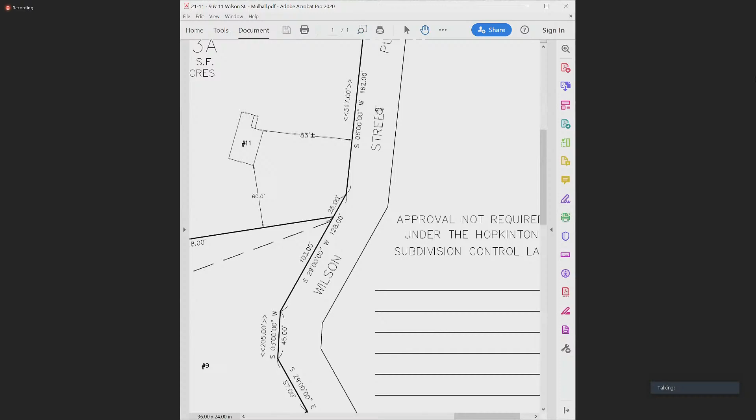Okay. And I know that you had one issue with this, John. Do you want to just highlight that? It says Wilson Road in the title block. It should be Wilson Street. I've got it right on the road, on the title block. So what we can do is on the Mylar, I can just cross off 'road' and write 'street.' And then if that's what the board wants, we can do that.

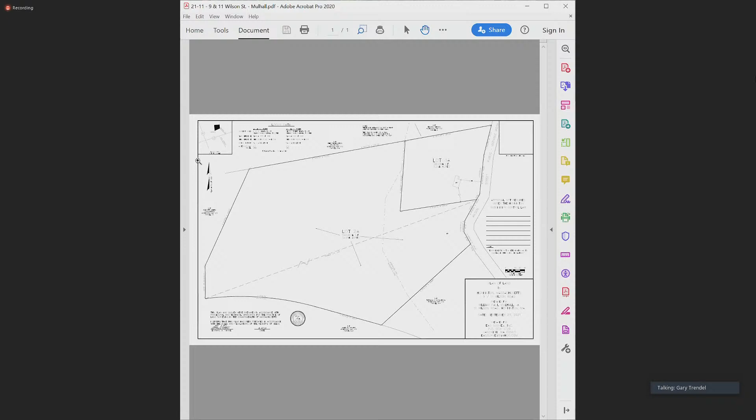Okay, any questions or comments from the board on this A&R? Through you, Mr. Chair. Yes. Do we know why they're doing this? Do they plan on selling the other lot or? We don't know. Okay, thank you.

Is everyone comfortable with John handwriting the correction? I know he has reached out on several instances to the applicant. They haven't responded, but is anybody uncomfortable with John handwriting on it so that it's corrected before we actually sign it?

I see thumbs up. All right. If there aren't any other questions or comments, I will entertain a motion to endorse the A&R for 9 and 11 Wilson Street. So moved, Sundar Sivaram. Mary Larson Marlowe, second. Motion and a second. Assuming no further discussion, we'll take a vote.

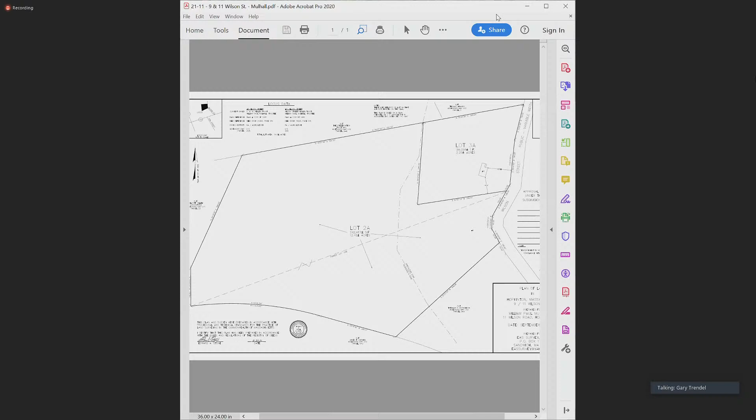Mary, how do you vote? Mary Larson Marlowe, yes. Rob? Rob Benson, yes. Jane? Jane Moran, yes. Dave? Dave Paul, yes. Sundar? Sundar Sivaram, yes. Fran? Fran DeYoung, yes. And Gary Trendel is a yes as well.

Motion carries. The next A&R is for lots 6, 7, 8, 9, and 10 Fitch Ave. Is Mr. Greenwald or an applicant for Mr. Greenwald on the call?

Rob Truax here from GLM Engineering Consultants, representing the applicant. Hi, Rob, how are you? Hey, good, how you doing? Good. Do you want to quickly explain to us the purpose and need for your A&R?

Yep, I will. So this Fitch Ave is not built at this time. It's a private way. Technically it's a subdivision that was approved 20, 30 years ago. There's been litigation with Mr. Greenwald and the owners with the town of Hopkinton. As part of the settlement agreement, my understanding is we're going to create this Lot E, which is up along the town of Hopkinton property. That area is surrounded by the town of Hopkinton property - the school is on one side, the athletic fields are on the other.

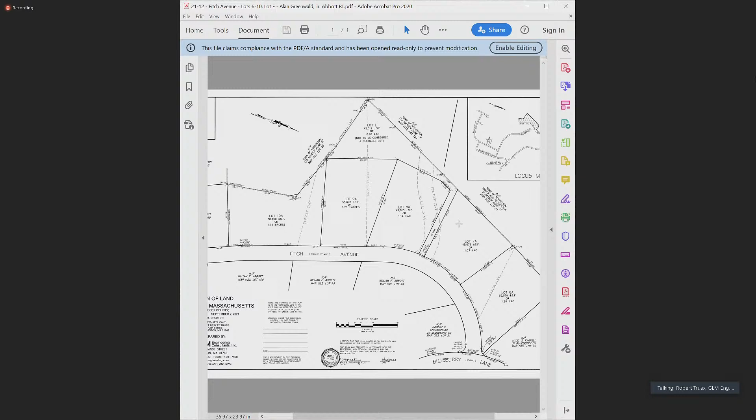The idea was Lot E would be conveyed to the town of Hopkinton with a 20-foot access way out to Fitch Ave. So we're rearranging all the lots on that side of the road from Lot 6 up to Lot 10 - that's the little strip that would go out. They wanted a minimum of 20 feet out to Fitch Ave. I'm assuming it would be for a walking trail to get from this side of Blueberry Lane, Fitch Ave, etc, up to the school and athletic fields. So that's the main purpose of the plan, to create that Lot E in the back there in the corner.

Okay, and then just so people know, we're rearranging - we just rearranged the frontages along Fitch Ave as well for those 5 lots. Am I reading this correctly that the dotted lines are the old lot lines? Correct. Okay.

All right, Mr. Gelcich, any comments from your office? No, we've gotten a question from a planning board member asking if this is allowed. I think as Mr. Truax said, it's a road that's laid out in a subdivision, so that's why it can go through the A&R process. Even though the road is not constructed yet, it is a way in existence, essentially - it's been an approved subdivision plan. The subdivision has been substantially constructed, so this would generally warrant endorsement.

All right, thanks, John. Questions or comments from the board? Through you, Mr. Chair. Yes, Dave. So I have two questions - the first one's really quick, addressed to John. Is there an open ending that the approval never expires? I think you've told us once before, but I forget the answer to how long an approval lasts for.

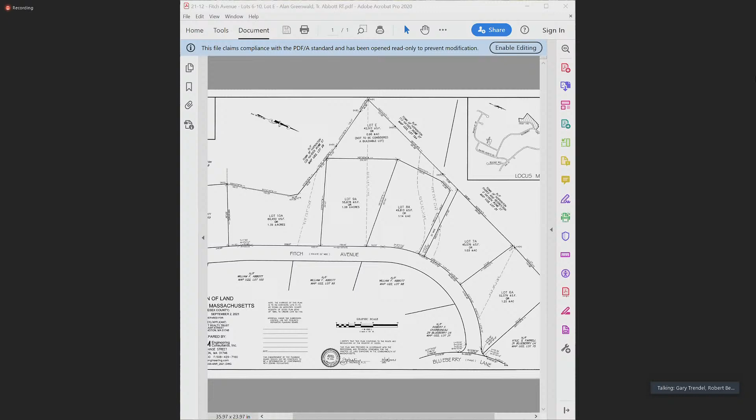All right, any further questions? That's just an overview. I know you're all concerned because it is an A&R, so I'm just trying to give you as chair as much info as I can.

Yeah, go ahead, Rob. So just to give an overview of timing here, Blueberry Lane was built in the early 90s, around 91, 92, 93, so 30 years ago. So the approvals happened before that. That was before EMC Park was built. That's why that road was there to that parcel of land, or what looks like a right of way. From my point of view, I think it was there to connect to that piece of land where EMC Park now is.

And maybe John can correct me if I'm wrong, but the subdivision control law came into existence as it is now in 1996, after this subdivision was built. It seems unusual to say a subdivision has been substantially built from 30 years ago and that it's still being built and that it could go through this A&R process. I just don't fundamentally agree with that. I don't see how that's appropriate without providing notice to abutters when they've lived there for 30 years. Too much time has passed that it's still, from my point of view, an active, approved subdivision. That's my take.

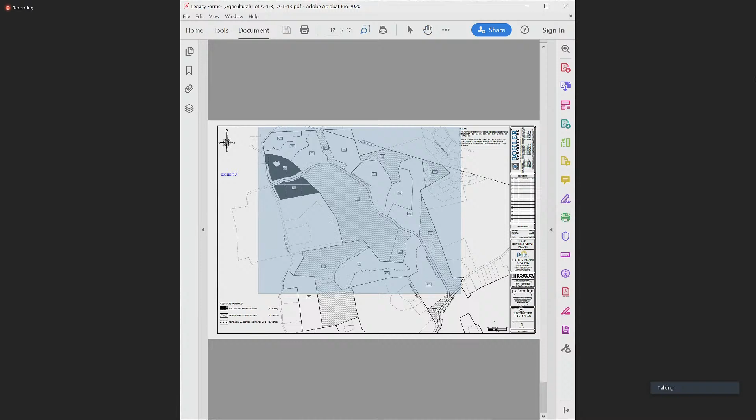And sorry, just as I asked that, now that it's pulled up, Todd, can you just tell us really quickly again as we look at this what specifically this is? Absolutely. The kind of darker striped area, near the top left, is the agricultural restriction. Weston Nurseries will use this area, have the ability to grow some of their PJMs and various other material that they will continue to grow on site in those locations.

The lightest color area, the dots you see along the roadways mostly and a couple other areas, is restored and landscaped area. Mostly that's area that's being mowed or maintained, or it could be part of a stormwater area that's being annually maintained. The striped area, the largest area, is the natural state restricted land. This really just encompasses trails and areas for people to enjoy and walk through, but there's no active recreation, no agricultural use, and it's not being mowed every week. Only the trail areas would be maintained for residents and all residents to use.

Okay, thanks, Todd. And the white areas are the development pods where all the homes are being built. Within those areas is additional restricted land, but those are done separately. All right, thanks, Todd. Questions or comments from the board?

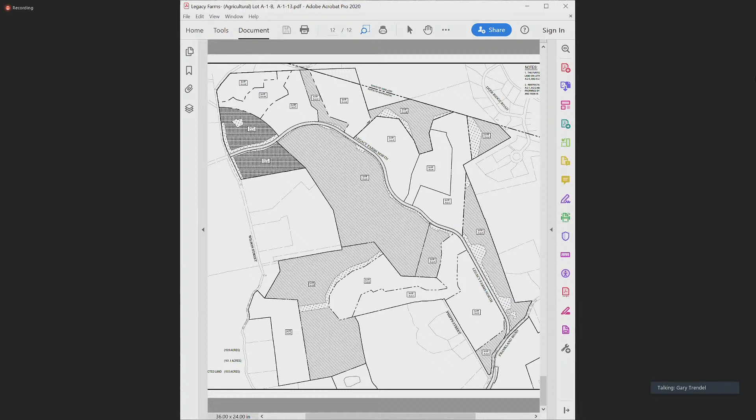Okay, any further questions before we take a couple of votes here? John, is it possible we can vote on all three of these at the same time? So why not. Okay, and what are we doing? We're accepting restricted land covenants? The official vote would be voting to approve the restricted land covenants and to allow for the planning board chair to sign on behalf of the board. I'd make a motion for that. All right, second. So there's a motion and a second as stated by our principal planner. Assuming no further discussion, we'll go ahead and vote.

Mary, how do you vote? Mary Larson Marlowe, yes. Rob? Rob Benson, yes. Jane? Jane Moran, yes. Dave? Dave Paul, yes. Sundar? Sundar Sivaram, yes. Fran? Fran DeYoung, yes. And Gary Trendel is a yes.

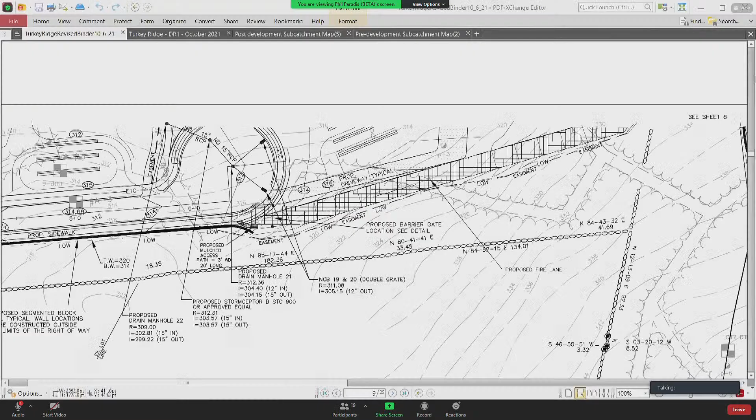Can you see that? Yes, yep. So one of the concerns we have - well, there's a few concerns - relative to the access road.

This access road will need to be open and accessible at all times of the year for fire department and emergency vehicles to be able to cross through this area. So the road needs to be fairly well-designed and not susceptible to vehicles getting stuck. There are a few things - one is just the entrance.

This is the road, this is the curb line, and it's shown off the pavement in a really awkward situation. Concurrent with that, you have a low point right in front of a driveway. It's not an ideal situation.

My recommendation is that everything gets pushed up like 20 to 25 feet, and maybe the access road comes off right here. That would allow the fire access to go straight. Right now he has to hit the curb at a weird angle to get in, and under severe conditions it may be difficult to do, or he's going to hit the gate or something.

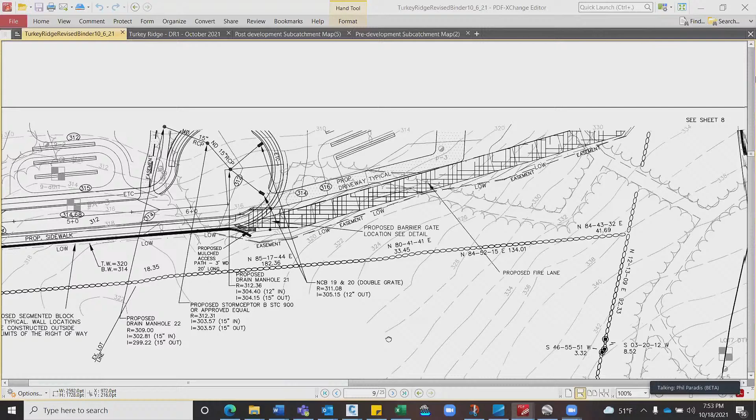So I really want this revised - this is a road and it should be a fixed radius in the design, and the profile should look continuous as well. Let me see if I can get to the profile.

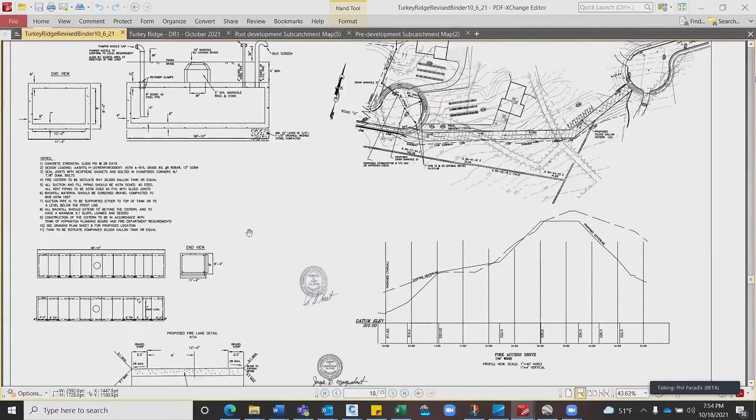In order for a vehicle to really be able to access these, you don't want to get a vehicle stuck because the front wheels are down and the back wheels are down, but you've got this sticking up. So there should be some vertical curves to smooth this out.

And engineer it, as well as we should know what the slope is here. This may be 10% or in excess of 10% slope, and depending on the material, it may be difficult to maneuver under wet conditions. So I think this road really needs to be engineered.

Bottom line. All right, Shane, where does this stand from your perspective? Because I think Phil makes some pretty good points, and if we were to apply a level of consistency, I look at how the connection has been designed and engineered between Chamberlain and Wayland. It is designed and engineered as a road.

When speaking with Joe today, obviously this isn't a public road, and hopefully it will never be used. I know he did all the sweep analysis with the fire truck, and we've coordinated that with Chief Miller to make sure the fire trucks are able to go from one end to the other. We're really tight for space at the front of that lot to shift that road. We've already moved it once to try to get it so it wasn't shared with the driveway, so we were pretty limited there. But the roadway itself meets all the sweep analysis for the fire trucks. Joe didn't treat this as a roadway, because it's not a public right of way. It's not to be used by anybody but a fire truck in the case of an emergency.

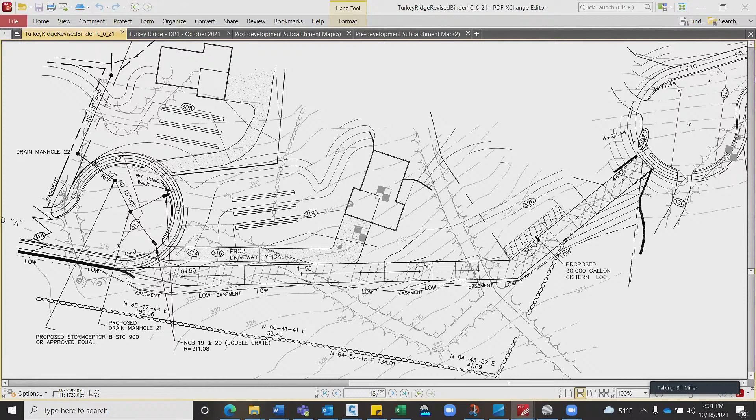Chief, are you comfortable that that's not a radius turn there? As I look at it, it does pose a little bit of concern. I want us to revisit that swept path analysis, showing if we could incorporate it into this. We did that at the entrance of the Chamberlain Wayland project, with the ladder showing the arc of the turns going in. I would like to see that if we could.

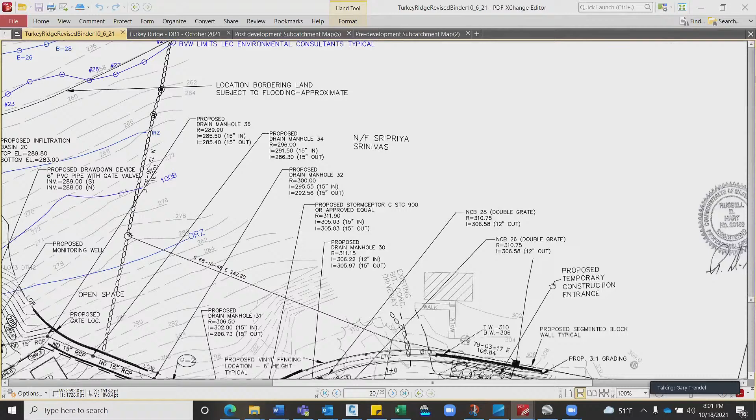And Chief, while we've got you unmuted, I'm also curious to hear your perspective on the westerly entrance, and also the elevation profile if you have concerns there. I'll be honest, I didn't realize the elevation profile until tonight, so yes, I do have some concerns.

We have to make sure that the bottom, what we call the beaver tail of the rear end of the truck, is not going to bottom out going up one of these inclines. That's A. B is, again, winter conditions - what are the grades? Will we be able to maneuver up and down without sliding or causing an accident or getting stuck going up?

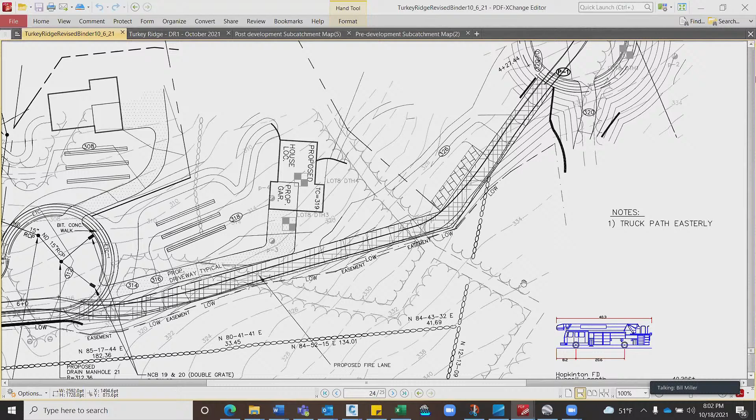And third, Gary, the end of the Cedar Street extension - show me the swept path analysis with the ladder, show me the arcs and curves on that corner, that'll work. And if not, then as you guys stated, potentially look at something a little less intrusive for coming in with that.

And Chief, do the curb cuts matter to you? Looking at that entry point, I'm not sure where the curb cuts would be to drive up through there. Honestly, Gary, we don't want to drive on a curb or someone's lawn getting in - that's something we definitely don't want to do. If you remember the entrance to Chamberlain, we had the same issue with that corner. We ended up taking the trees down and pushing that corner back so we could make that sweep. It's identical to what we're looking at right here.

Okay, to the chair. Go ahead, Jane. I agree with Beta's comments, and I think all the questions the chief is asking would be answered completely in a full engineering design for a road, if this were designed better. I'm very concerned about those 10% grades, especially at the curve. I'd like to see where the grade starts, considering that curve - if that's at the curve and they're expected to go up a 10% grade, that's quite a bit. Same thing coming down - it doesn't look too healthy for them at first look, after hearing Beta's comments.

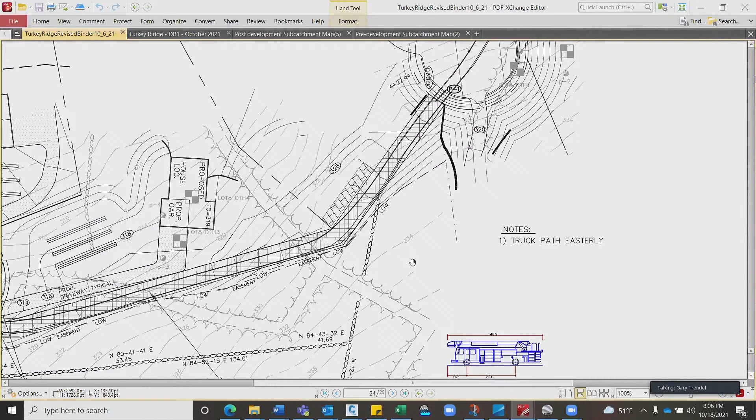I couldn't tell you what the design standards are for a road, but in my opinion, I think we need to treat this like a gravel road would be treated, and that's to ensure proper access if it's required.

To you, Mr. Chair, I know we kind of want to move on this one, but can we take a quick look at that elevation again? Can we tell what the difference in elevation is between the two cul-de-sacs?

So they're roughly the same, it looks like, right? You just have to go up and down. And Phil, what's the height from the bottom to the top? So this says 311.83 to 330. So like 20 feet, if I'm understanding that? Yep, 19 feet, almost.

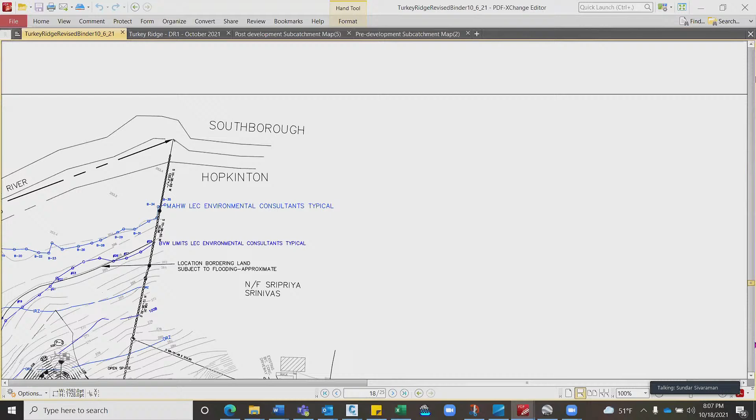Thank you. Through the chair, clarifying question. I recall hearing that a swept analysis was done, but now I'm hearing it may not have been done, or done with the wrong truck specifications, fire truck specifications. Could you please clarify that?

So the swept path analysis was submitted. Again, if you look at it, the truck has to hit the curb at an angle, which is not ideal. And he's maxing out, so this 16-foot wide drive is something of a misnomer.

Let me see if I can find the section. Oh, went the wrong way.

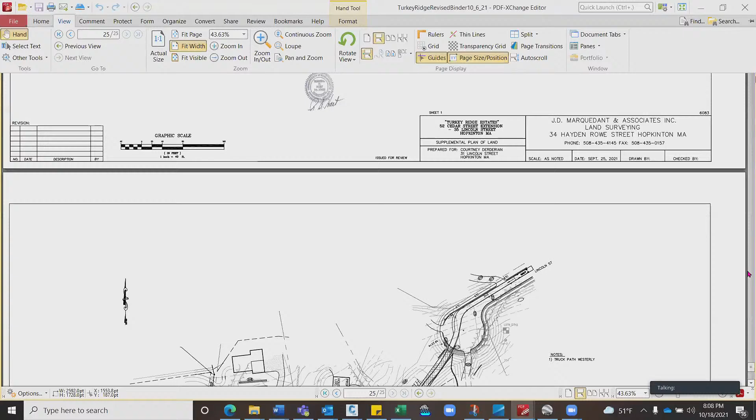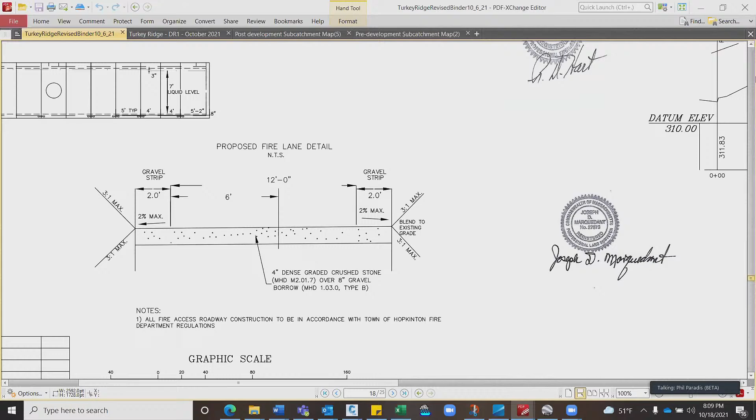So there's a gravel strip. Not quite sure what this is trying to show, but it's dense graded crushed stone and then a gravel strip. So the truck actually has to go off the dense graded stone on one side and then come back on the other side, so it has to use the entire 16-foot width based on the swept path analysis. If they go over, I don't know how bad that is, but...

Yeah, go ahead, Mary. That's something I was thinking about as well, Phil. I'm just wondering, for a gravel road, what is the usable width, particularly in the winter, when it's being plowed? Are they plowing every inch of that 16-foot width onto the downward sloping shoulders, because that's what would be necessary for this use? If it's gravel, I don't think of a gravel road as using every inch of it. I think of using the center with a little bit on each side, so kind of 12 feet plus a little extra for tires to go over. That's my concern, particularly in the winter.

Just to follow up to Mary's point, if I may, Mr. Chair. Sure, Dave. She brought up a great point. Plowing on gravel seems to be a problem. Is that what we're doing on Chamberlain? Gravel as well? No, it's paved.

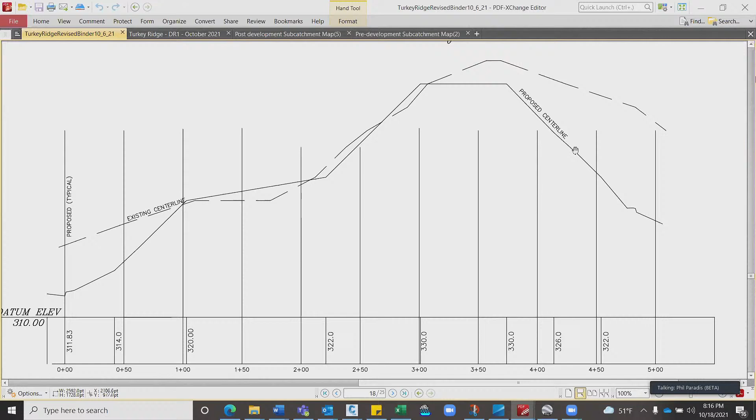So the second issue is that this should be a rounded curve to provide better access. Right now it requires maximizing the width, and if you're off by a little bit, your truck may be in trouble. The third thing is that the profile is just not well designed. You've got a steep incline here, and then it's your turning point. This should be fitted with curves to allow the vehicle to transition over the change in grade safely. We'd also expect to see what this grade is. 10%? Yeah, that's pretty steep, and then to go from 10% to 0 and then down 10% - that's not a well-designed road.

And I guess, Mr. Chairman, we all appreciate that this access road is only for emergency vehicles, that fire and police will make their way to utilize this when convenient. We don't anticipate frequent traffic - in fact, we anticipate no traffic. But I understand concern about access through that road, but the only folks using that are fire and police in an emergency situation. Yep, I understand.

So I'm not concerned with sight lines, I'm not concerned with two-way traffic, but I do put a lot of weight on the perspective of our emergency personnel, and I want to make sure the emergency apparatus can get through that emergency access road if need be. And based on the previous discussion I heard, neither Beta nor our fire chief are comfortable with the emergency access road as it has been proposed. Again, that's just speaking for myself here - that's my perspective, but it's also based on the conversation we've had.

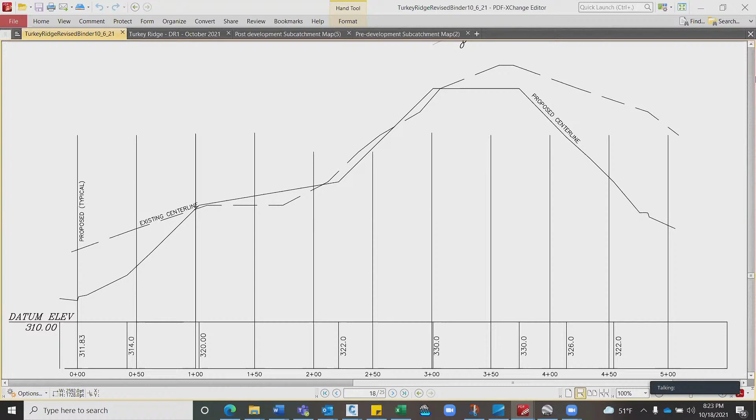On the drives 1, 3, and 5? I guess I don't follow your thrust, Phil. Phil, are you able to show us on the drawings? Yep, I can do that.

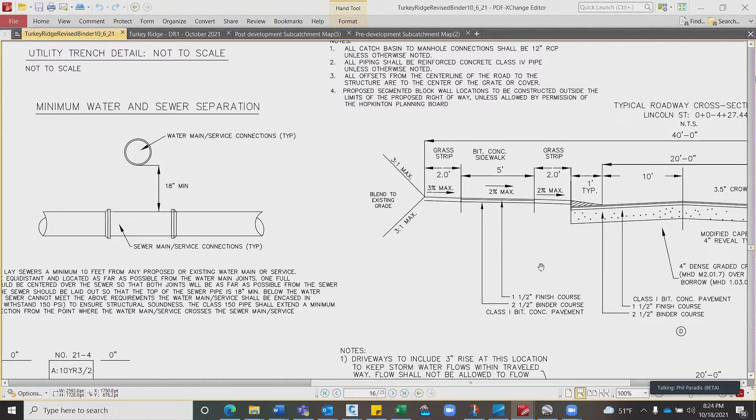So that's your typical section. Okay, here's the driveway section. Sheet 16, right. So the plan shows it dropping from the edge of pavement down.

So now you're introducing this 5-foot area going up, but you're still showing the driveway up. It should be down. It should show a thought-through engineered plan - like a radius here, it should show a radius, and show the intention of this section.

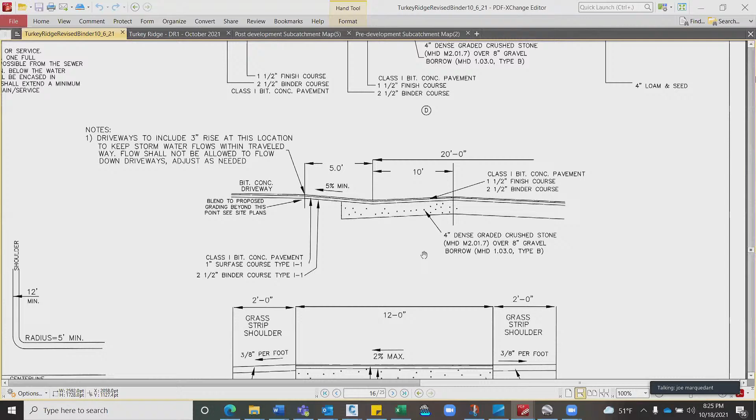So the 3-inch lip is what we're trying to convey. In that short distance, we'll make up a 3-inch lip to provide the mound that you spoke of, and then blend down to the grading shown on the plan.

I guess I'm asking, are you looking for individual details of lots 1, 3, and 5? Just show me whatever your typical slope is coming down from the driveway, and then show me how you're going to engineer that. What am I going to look at when I'm out in the field inspecting these?

The 3-inch rise at the location to keep stormwater flow within the travel way is shown in note 1.

Sure, Dave. I think, Joe, what he's suggesting is this kind of looks like a flat driveway here. I think he wants to see an average of those lots and a sharp, rounded decline on the left. Does that make sense?

These are not terribly difficult details. These are typical details, so they should be provided. Joe, can you provide that? Certainly. All right.

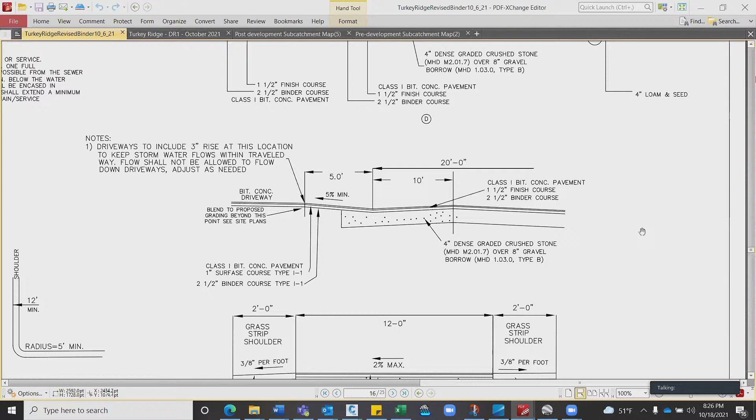How about D6? Open space trail plan. So it sounds like, Joe, you're not in a position to respond to that. Shane, are you able to respond to comment D6? I'm actually going to take it, Gary.

That's okay. So we've worked with Halt, and we have no intentions of creating new trails out there. All the trails that we've all seen on previous plans no longer exist. So when open space is donated, Halt will come in and work their magic. We don't have anything to do with it.

I know in a number of other plans that's been something we've gone into the details on, what that trail plan looks like. But before I go further, I see Mr. Dauchi has his hand raised. We'll go ahead and hear from Mr. Dauchi, who I think is probably representing Halt.

Charles Dauchi, 25 Sanctuary Lane, member of the Halt Board of Directors. I would concur here that the trail network, so-called, that is shown on the plan really does not appear to have been a functioning through trail network, as has been the case in some other subdivisions.

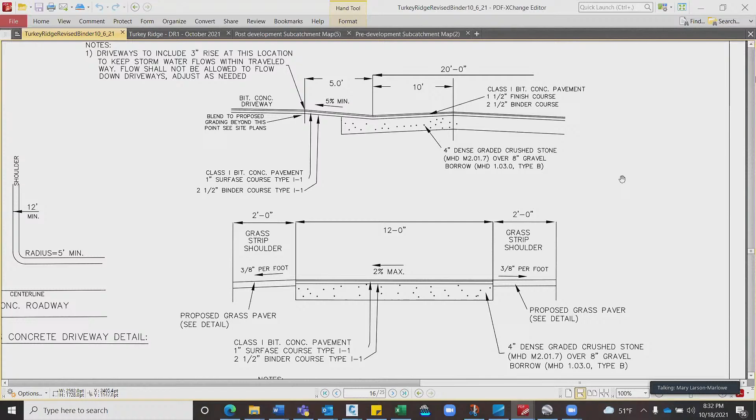Yep. Through the chair, it sounds like Chuck had indicated that there are some accessibility issues in terms of where those entries into the open space are proposed. So I think we just need to ensure that there aren't retaining walls in the way or whatever the case may be. Can we take a quick look at those? Yep. I think that's where Phil's going to.

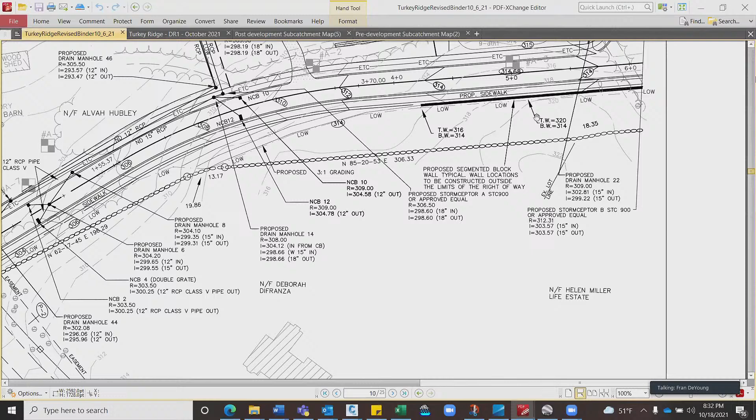And as Phil's pulling that up, Mr. Chairman, I think it's one of the things we should ideally come to agreement on regarding public access being secured and maintained, as Mr. Dauchi mentioned. What transpires within that is up to whatever entity takes that over. But securing that public access, I think, is an important component, and now would be the right time to do that.

Through the chair, clarifying question on that.

Sundar, Mr. Dauchi said that HALT is not committed to taking over the land for trail purposes. Just out of curiosity, if the public access question is not resolved to everyone's satisfaction, where does that leave this? If open space is still preserved, but due to various reasons an entity doesn't commit to building trails out there, is that, for lack of a better term, a deal breaker?

May I, Mr. Chair? Yes. Go ahead, Courtney. Thank you. So I do want to clarify that the way the plans are right now, there is 100% public access each way.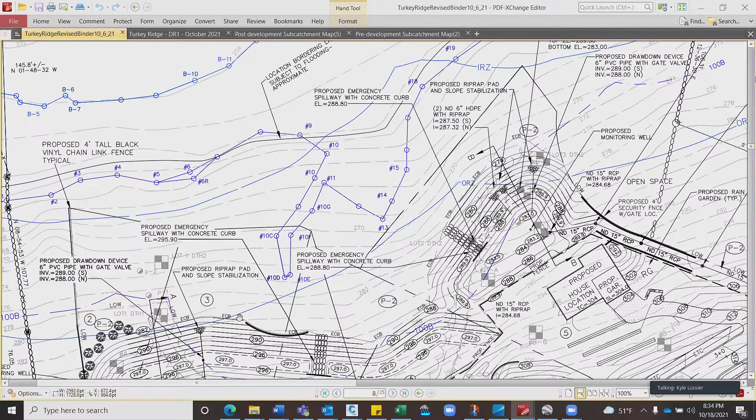From the very beginning, when we began talking about this project, there is a connection from Cedar Street Extension through Lincoln, all the way on our road into Hopkinton State Park. That was really important to HALT, and important to the planning board from the beginning. So that has not been changed or altered. There is public access. To answer the other question, we certainly are fond of HALT and hope we can come to an agreement so that's the group that takes over this space. We're going to work as hard as we can to make that happen. If we cannot meet all of their requirements, we do have a plan B in process, so we have a backup plan if this land does not go to HALT.

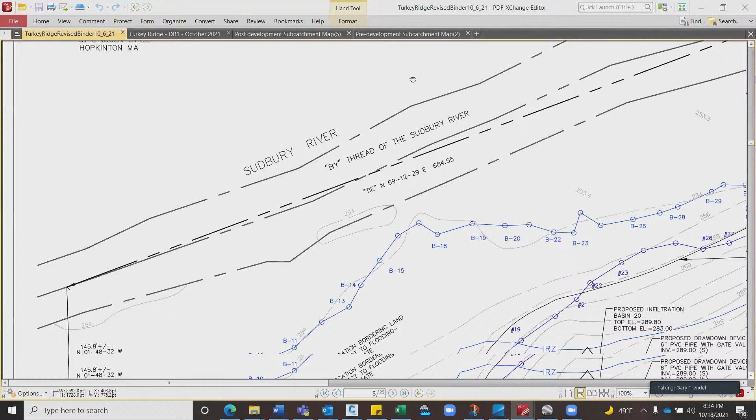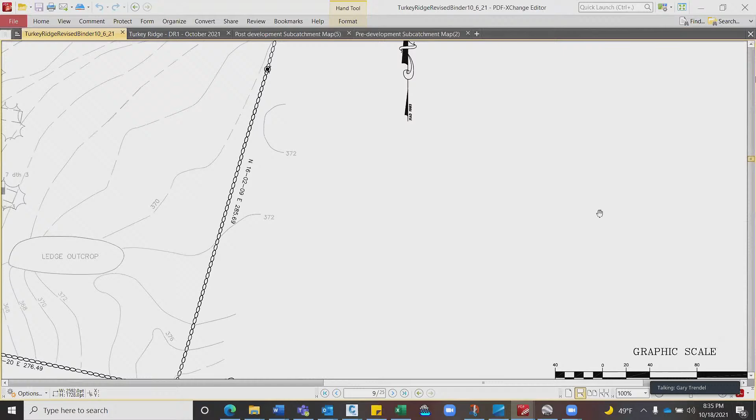Okay, thanks Courtney. So just to clarify, on the Lincoln Street access, I understand that you certainly have access via the emergency access road. And I'm wondering, Phil, is that the primary access point to the open space from Lincoln Street?

Can you see, do I have this up? No, you've got it up, Phil. So I don't think there's any restriction going this way. Obviously it's a steep slope, but that's the nature of it. It does look like there's a wall here and a wall here, but it looks like you can get through here in some fashion. As was stated, you can get through, you can connect the two via the access road.

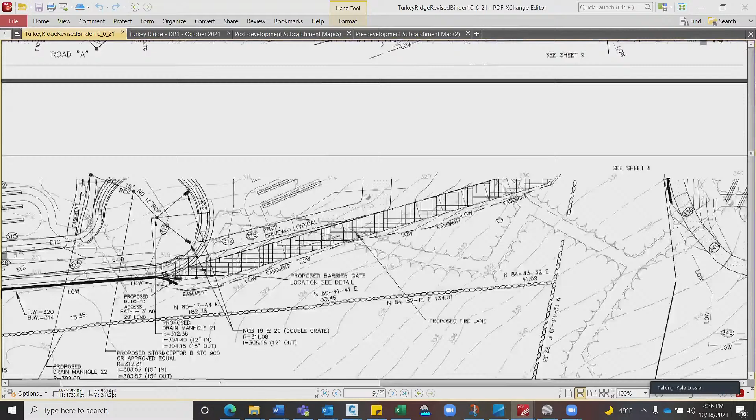It looks like you might be able to get to the, are these going to be accessible? Is this open space going to be accessible from the emergency access road? I don't want to overspeak, but I believe it is, because the idea was for trails back there. We included the access road as something people can walk if they need to, or if they want to.

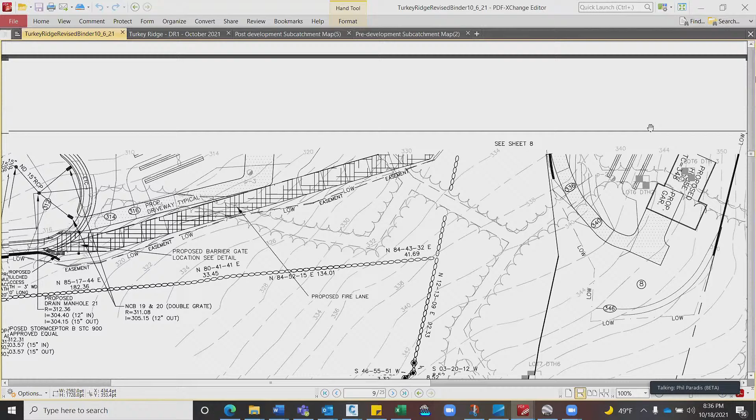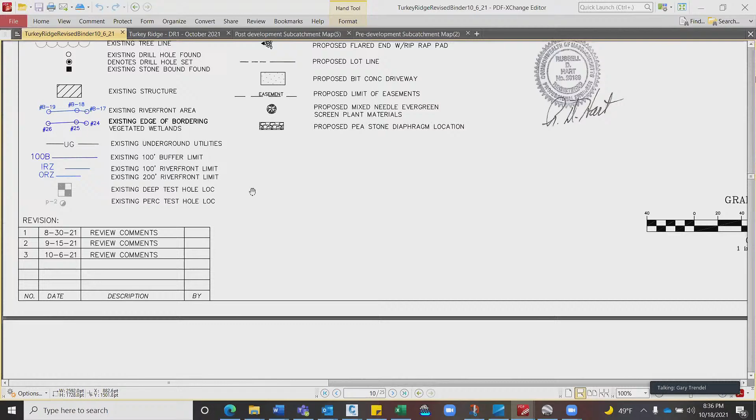So that allows you to get access all along this edge. Up here, again, you're coming around from Lincoln, you can get through here. So it sounds like plenty of access points to the open space off of the roads and the emergency access road. And there's a super helpful skinny view to see it. Thank you. Yeah, I think you're all set, if that's the measure you're looking for.

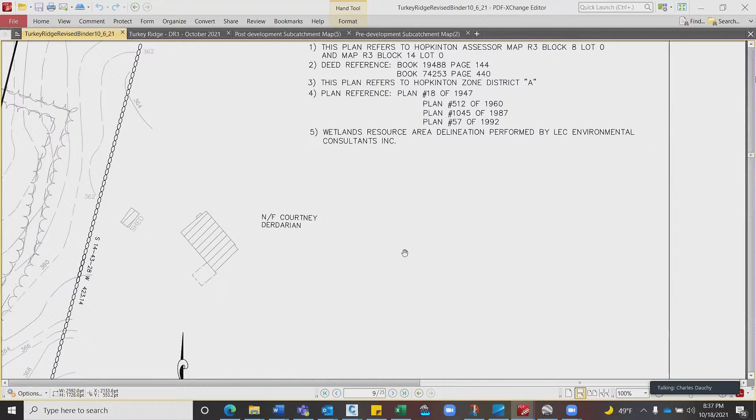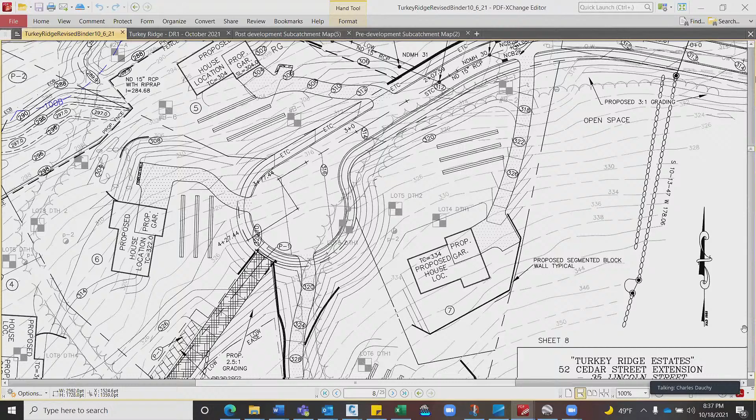So, Mr. Dauchy? Yes. Mr. Chair, if John could go back to the cul-de-sac at the Lincoln end, that's the area where I think there are some practical concerns. There we go. And show north a little further, please. This way? Yep, that's great. Thank you. The slope, just as you enter the property, as your engineer indicated, there is a relatively steep slope there.

What would be helpful is if there were shown on the grading plan some mitigation to make that slope a little more walkable. I see there's a post contour 312 on the road, 314 in. Yeah, south of that, to show grading that would provide a walkable grade, an easily walkable grade up into the open space. That would be helpful.

On the opposite side of the road. Hold on, can we just be clear on what we're talking about? I'm sorry, say again please. Can you walk Phil through where you're talking about and put the pointer on it so we all understand? North of the road? Yes, 312, where the palm is showing, and then come straight south from there. Right, this is 314, 316. Yeah, I mean, he's graded it.

That's not a comfortable walking slope. It's certainly climbable, but if it could be evened off to more reflect the overall slope of the grade in this area, that would be helpful. Okay, so you're talking south of the road? I thought you were talking north. Yeah. It looks like they tried to do that, they spread out the contours here, so it's pretty consistent all the way up.

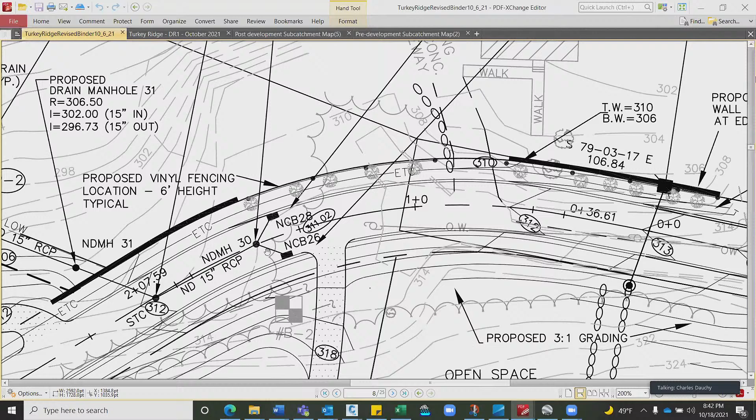Yep, that's not a problem. Okay, so it sounds like they can work together to figure that out. That's what I'm hearing. Yep, very simple.

Okay, any other questions about trail plans? It sounds like people are generally comfortable as long as there's access, and I think that with that minor change, we're comfortable with access to the open space. Agreed. Yes. Okay, so we've got one minor change there, which the applicant can make, and I think that addresses D6.

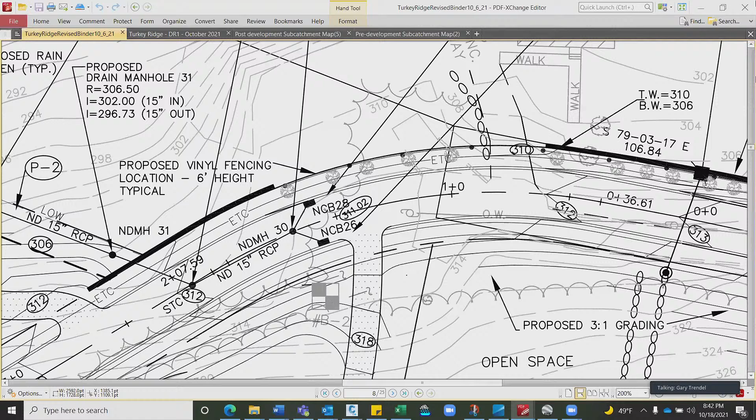Joe or Shane or Phil, just from a time check, we've got 7 minutes left on this topic. Of the remaining open issues, are there any in particular that you want to bring in front of the board?

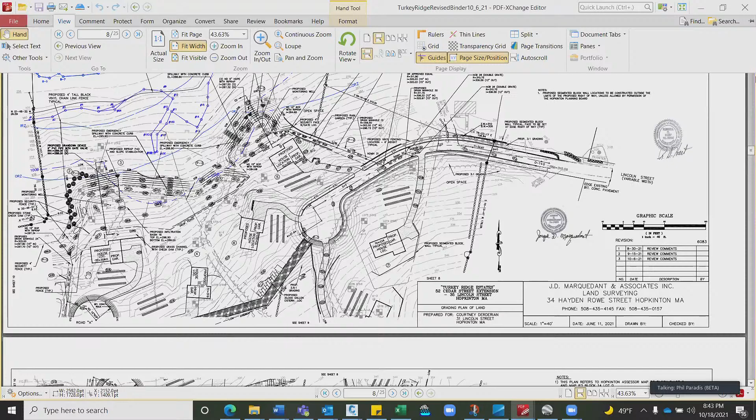Yeah, I'd like to offer a recommendation relative to the change for the current set of plans. It includes a new infiltration basin, and it's primarily for the 60 feet of roadway at the very end of the project. It requires, it's showing, a couple catch basins, manholes, a pipe system that goes all the way here, and ultimately disturbs this land to provide an infiltration basin for very little flow.

My recommendation is that the applicant rethink this and maybe put a small rain garden or something, maybe change the cross slope so that there's no sidewalk on this side. We could just put a sluice and a little sediment basin and a rain garden right here in this area. I'm not sure what this P1 is for, but I think that would be a lot less expensive and a lot less burden to the homeowners association to maintain. So that's a recommendation I have for this. It would just save everybody money and time and such.

So Phil, is that outlined anywhere in the letter? It's at the very end. All right, SW 47. Yep. If that's not the case, if the applicant wants to - and that's their right to do that - we would at least need 2 test pits in this basin to confirm the soils and the groundwater. But I'll leave that up to the applicant.

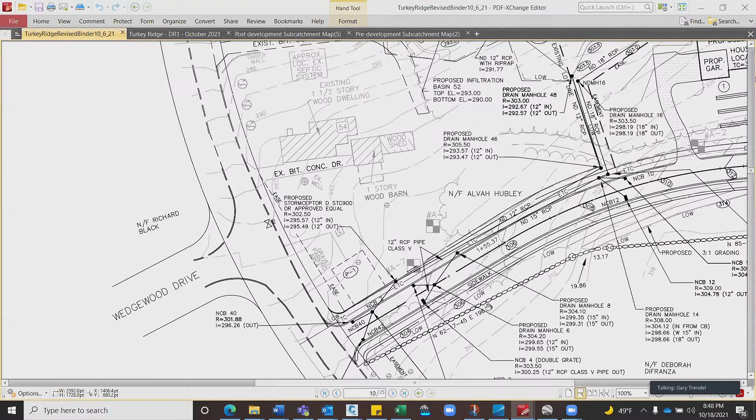I guess, Phil, what Fran's getting at is not only the stormwater perspective and potential impact, but even the visual impact. It's hard for me to get a sense of the impact of that feature you're describing.

I think it's open space now—it looks like the tree line is somewhat back here. But if they could have something, that's a lot less disruptive than a huge thing in the back. I don't know where the neighbor is, but it doesn't have to be big. It could have a subsurface of stone to make it even smaller, fitted with a rain garden or landscaped well. It could even look like a little bowl that nobody would know is a basin. There are several options.

I get it, but the area you're using with the cursor—is that part of the Hubley property, or part of the applicant's property? You keep circling around that P1 with the cursor down below, and I think this is also on that property. It looks much bigger—it looks like the lot line is here, so whether it's here or there.

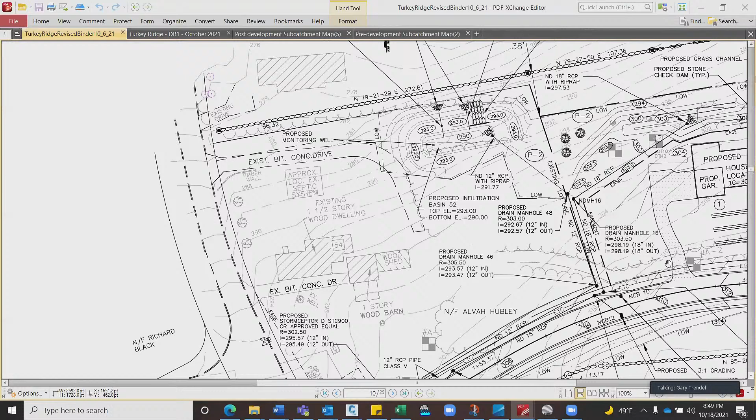Mr. Marquedant, can you confirm that infiltration basin is on the Hubley property in the back there? That basin sits on an easement reserved from 2004, the P2 easement, the permanent 2 easement. The P1 is also an easement reserved should we need to install something at that location—just trying to plan ahead.

Okay, and are the Hubleys aware of that? I assume there's been communication and they're aware of both of those. There were discussions many years ago—I have not spoken with them recently, excuse me.

Since day one, I think I told you guys we were really open with all the neighbors, and the Hubley property is represented almost like an estate—a lot of family members participate, but one main person takes all of our calls and emails, and he's very aware. He's seen the plans. I don't want to speak for them, but as much as we reach out and try to keep them updated, they have never had concerns. They're made aware of the planning board meetings and every time we go out there and touch the property. So on our end, we don't know how much more involved we could get them. They seem comfortable with what's happened. I don't want to speak for them, but they've definitely been made aware on our part how this is going.

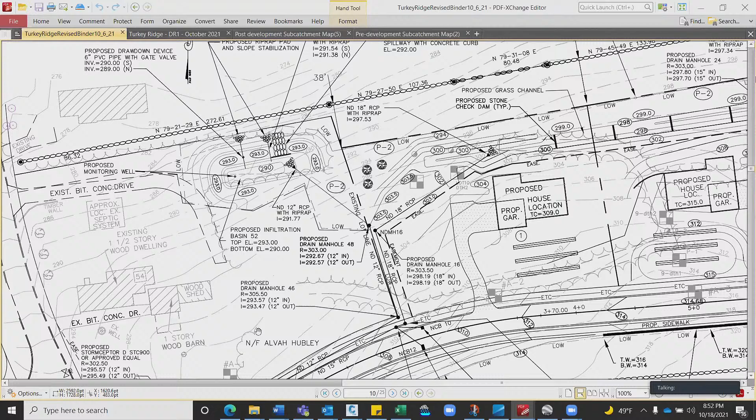If I were to summarize, it seems like the alternative is less of an impact to the total easement area. It's lower cost. I agree with Fran's comment that it'd be great to make sure the abutter had some opportunity to weigh in, as in reality either one is being built on their property. But I don't think any of us want to speak on their behalf, though it seems like the less obtrusive one that's the lower cost is probably a benefit to all parties.

Through the chair, this also could be an example of the low impact development that I think John Gelsich showed us in previous meetings, and establishing a rain garden is one of the examples he had called out. So it seems very consistent with that approach as well.

Thanks, Sundar. Any further thoughts on that discussion? It sounds like as long as there's not a major objection from the abutter, and recognizing that either one of these would be on their property, there's probably some preference to use the less intrusive option.

When you get a chance, Mr. Chair, I do have a general comment not related to that. Okay, well, we're over time, Dave. Yeah, I just wanted to get this in before we broke, though. Okay, go ahead, Dave. Thank you for honoring that.

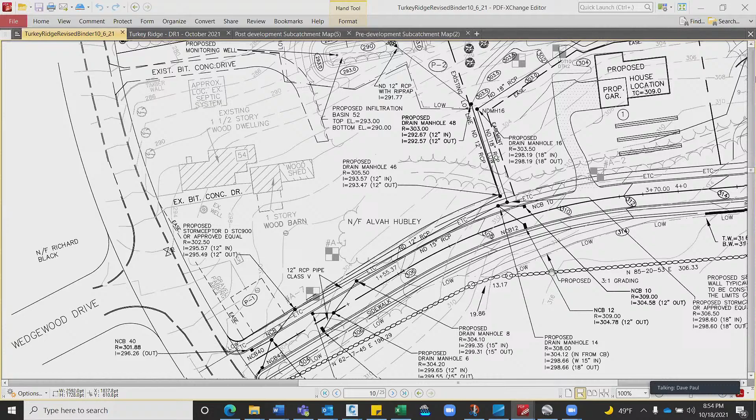Just to go back to the access road real quickly, I just wanted to make a request that if they, you know, it seems like there's a lot of discussion with that. So if we have an opportunity where the planning board, any of the members, can be invited for a walkthrough, if they do have that, I would like to. If they end up walking that access road and discussing it. If that's something the applicant could just make us aware of.

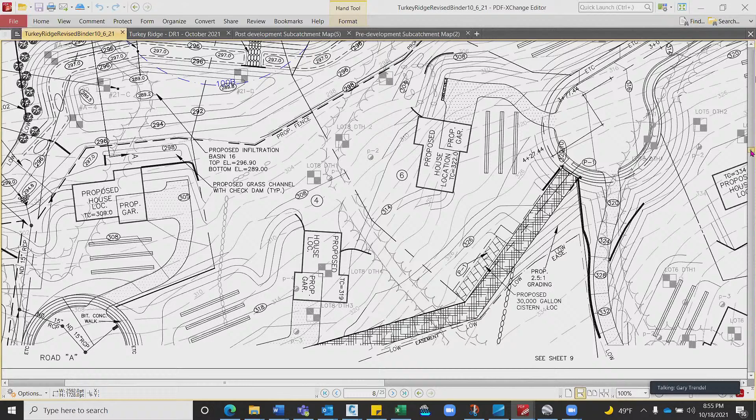Okay, so what you're requesting is if there's any on-site discussion or walk or evaluation, you'd like to see if there's an opportunity for the planning board to participate. Yes, correct. Even if there's some kind of resolution, and they're going to be out there looking at it, that would be great. Just so we can get our eyes around it instead of just looking at a piece of paper. Okay, thank you. Thanks, Dave.

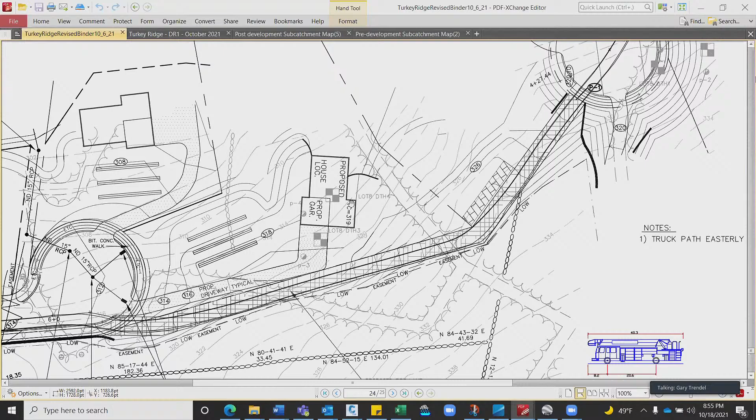All right, so we're going to need to continue. Hopefully we got through some of the bigger points of consideration in the beta review. I guess my question to the applicant is, our next meeting is November 1st. My ask again is that as many of the outstanding issues that can be addressed offline be addressed offline. And I realize there are always going to be some things where maybe there isn't agreement, and that's what we should be reviewing.

But I guess my question is, do you feel like you would be ready to come back to us November 1st? Or do you need a little bit more time, at which point November 15th would be a better date? I think November 1st, we're right there, so. Okay, all right, and I'm okay with that. Like I said, we need you guys to work offline with beta.

So if you're comfortable, you can do that by November 1st and actually have those materials wrapped up before the meeting, our meeting packets go out, then I'm fine with that. So on that note, I will entertain a motion to extend this hearing to November 1st and also extend the decision. John, what's the recommended date for the decision extension?

Okay, so I'm trying to share my screen. I'm just figuring this out. I don't know why. Oh, there we go. Okay, now share my screen. That's not happening. Okay, hang on. I've never done it for PowerPoint before and it's not showing up. So John has to, and John looks like he's stepped away. Oh, here we go. Momentarily, but John needs to give you access. I think I have access. Okay, did you see it? Yep, now we can see it now. Yep, okay good, now I've got to just switch it over to slideshow. And okay, here we go. Okay, so...

We started off really trying to educate ourselves on what is the current status and addressing some issues like the payment in lieu of creating affordable homes and so on, and ended up really trying to define where we want to focus our efforts as a committee as well as a board, and we wanted your input on that.